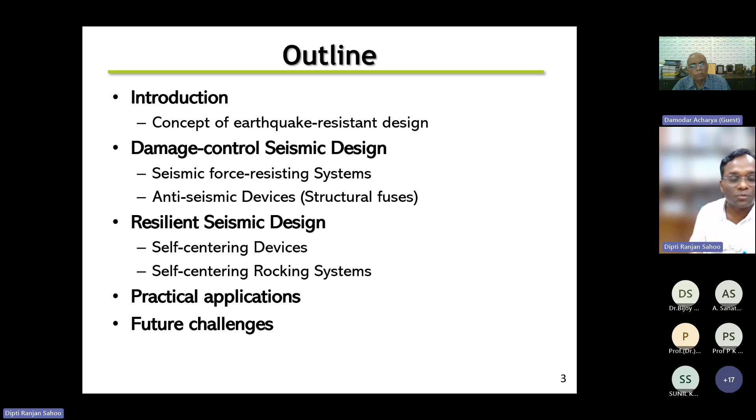So as we know, the earthquake is a result of some kind of release of energy due to breaking of some plates. It may be within the plate or maybe sliding between two plates, which occurs a few kilometers below our earth surface. Where it happens, we call that the focus. And if we directly see on the earth surface, we call it the epicenter. So the focus is the point where a lot of energy is released, and that energy is transmitted all around in terms of waves.

And these waves pass through the body of the earth, so they are primarily called the body wave. Once it reaches the crust of the earth, it's called the surface wave. In case of the body wave, there are two things: one is called the primary wave and one is called the secondary wave. Out of these two waves, one is much faster than the other. Typically the P wave, the primary wave, travels much faster, and it can pass through any medium, whether solid, liquid, or gaseous. Whereas the secondary wave, the S wave, can only pass through the solid medium. And what is dangerous for our civil infrastructure is the surface wave, not the body waves.

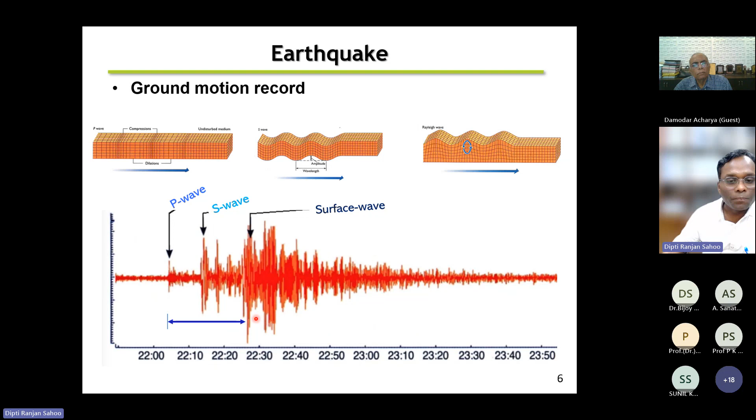We know that it is an energy release; we have energy release in an explosion also. So I just wanted to give an impression here: if this is the signature of a wave, you can clearly see this is the earthquake. There is a P wave, an S wave, and a surface wave. Whereas if you have an explosion, like an underground blast or above ground blast, the wave signature is quite different from the earthquake.

This gives us a lot of information about the nature of the signature, because at one time you have the P wave, then after some time the S wave, and after some time the surface wave. The gap between the P wave and S wave gives us some information to work on the earthquake early warning system, which I will talk about briefly towards the end of this lecture.

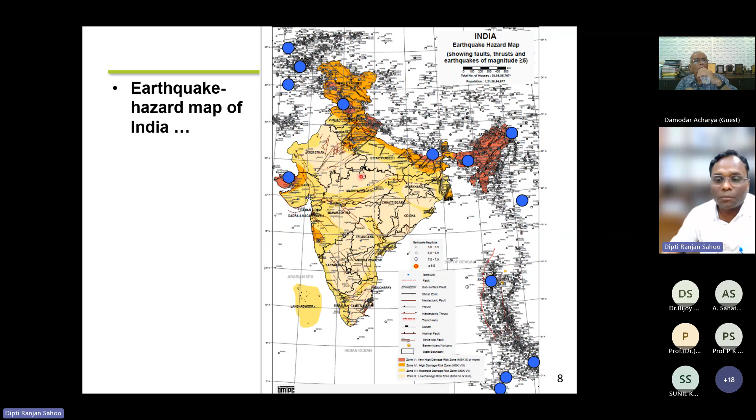And if you look at the major or big earthquakes, with magnitude of more than 8, there are a number of them. So in the entire Indian subcontinent, you can see there are many faults which are quite active and have the potential for generating relatively bigger earthquakes.

So what we have right now is called the current practice in terms of design. In design, we expect that for the same structure, if there is minor shaking, after the shaking my structure should not be damaged. I can use the structure immediately. For moderate shaking, there will be some damage which can be repairable and reusable.

And if the same structure is severely shaken, the goal is it should not collapse, so I can save the people who are occupying this building. So the intention was that no building or bridge should collapse under severe shaking.

What is of interest to us is that many minor earthquakes happen; in Delhi, every 1 or 2 months there are a couple of minor earthquakes. But if there are moderate and major earthquakes, the damage should be controllable, in a controlled manner. That depends on how well we have designed our structure, and at what level of damage we can allow. So that is essentially the current earthquake design practice.

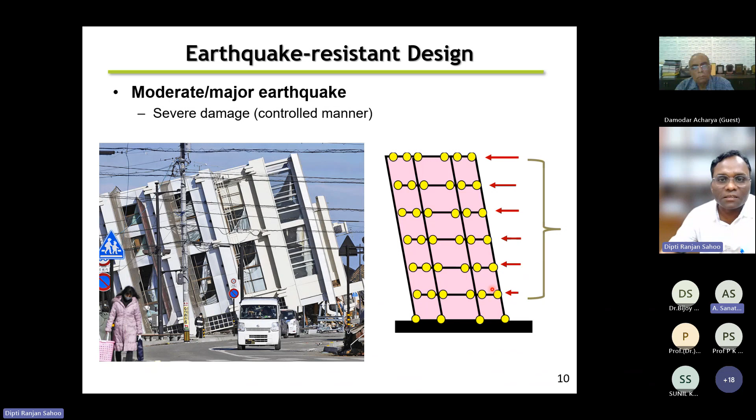To give an overview of earthquake resistant design: the basic philosophy currently is that during an earthquake, it doesn't mean that my structure will not be damaged. I allow my structure to get damaged, but it should not collapse. So there is a difference between damage and collapse.

The term damage means anything which is not a linear response. Because of the inherent structural or material characteristics of the concrete, steel, and masonry we use, we can always rely on the nonlinear response of the structure. For example, the Taj Mahal has been standing for a long time without any damage, probably having experienced relatively moderate earthquakes.

Because if you compare the dimension of the wall, it is in terms of meters. But if you look at our walls, our columns, they are quite small. So the reason is that making a structure that will not be damaged in an earthquake will be very, very expensive. The second one is there is no guarantee that during the lifespan of the structure there will be an earthquake.

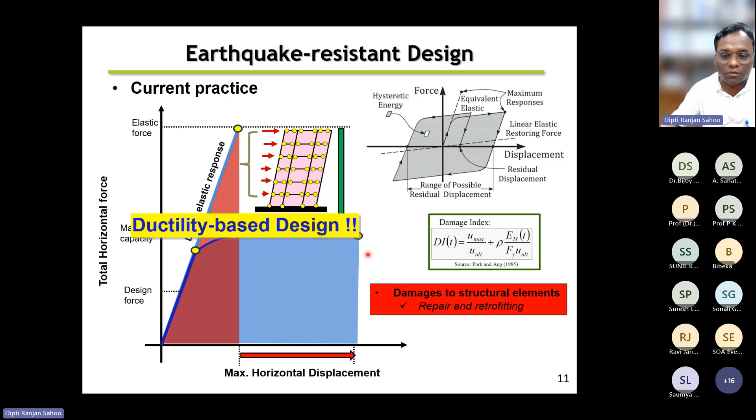That's why the current design practice is based on a term called ductility, which is essentially a measure of the displacement from your linear portion to the ultimate deformation level.

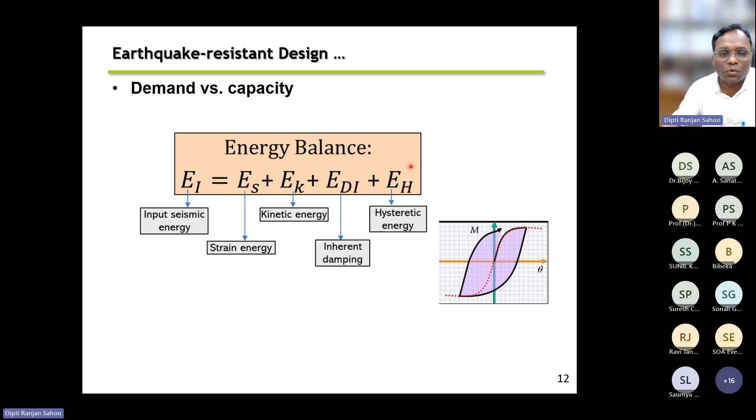So the output is a combination of the strain energy, the kinetic energy, and each material has some kind of damping, so it also releases or absorbs some energy. And the most important point is, because the earthquake loading is cyclic, there will be some hysteretic energy. I will come to this part in detail in a subsequent slide. So if this is the capacity of my structure, if this component is higher than this, then my structure will survive, otherwise it will fail.

So in terms of the hysteretic energy, if I take a structure and pull it or push it, if it is linear, this part is called the energy stored, because if you release the load, it will come back to the original position. If you again apply the load, there will be a point when it will go to the inelastic range. And if you do cyclic loading, this shaded part will be energy recovered, because it's essentially the same as this area.

So if you look at this part, it's a kind of rhombus, or parallelogram. This is typically the area which is the energy dissipated. And if I have shown it in one direction, if you also draw the negative direction, that becomes your hysteretic energy under cyclic loading. So that is the strategy we use in earthquake engineering.

So the first part is we reduce the intensity of the vibration by adding some additional damping, which is simply called the damper. For example, in your door we have a door stopper, right? When you open it and just release it, it will come back to the original position because there is some damping involved. And in structures, a similar kind of concept is used, that is called damping.

Or we can increase this component, which is called the hysteretic energy. That means we need to increase this kind of flag-shaped area, which is called the capacity. So the more this area, the higher the earthquake resistance capacity of the structure will be.

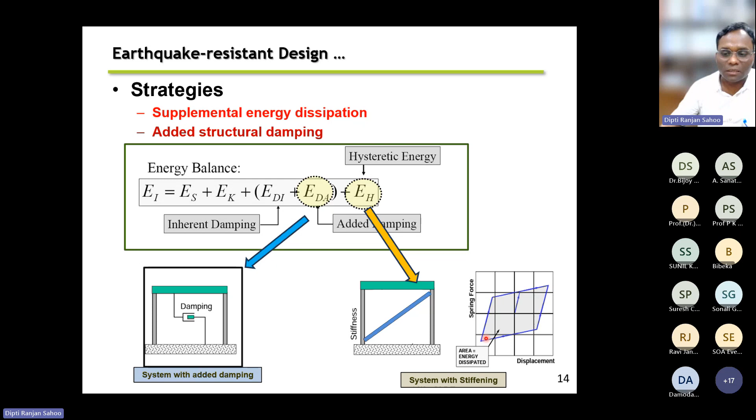So just briefly, what is the effect of damping. I give the example of a door stopper. Mostly the damping comes from the term associated with the viscosity. This is called viscous damping, and we typically represent it in kind of dashpots.

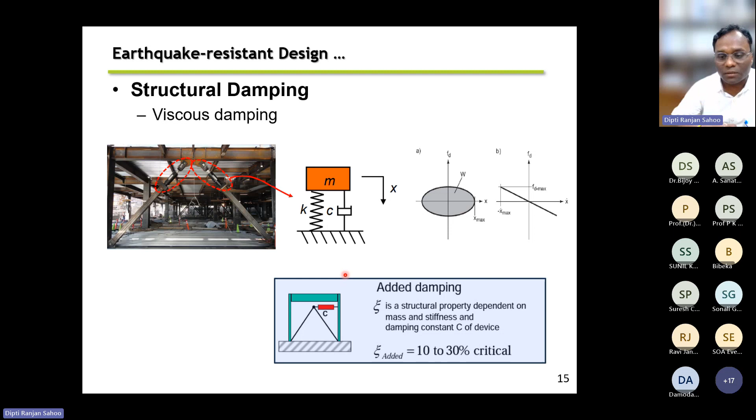If you look at a structure, probably I can use two viscous dampers here. And if you look at their behavior, the force versus displacement behavior, this area is the energy being released or dissipated. A typical viscous damper used in the structure adds additional damping in the range of 10 to 30% in addition to the inherent damping.

The effect is, the more the damping you have, the faster degradation of your vibration effect. At the same time, if I have a structure which is more damped, I can design my structure more efficiently, because the force demand required to design the structure also reduces.

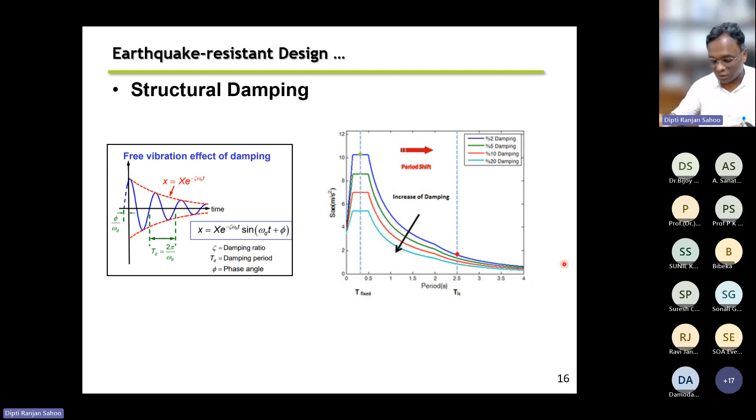But it has some demerits, which I will explain in subsequent slides. The whole idea is to increase this area, because the more the area, the more energy dissipation capacity the structure has, and it is better for earthquake resistance. So there are many ways to do this.

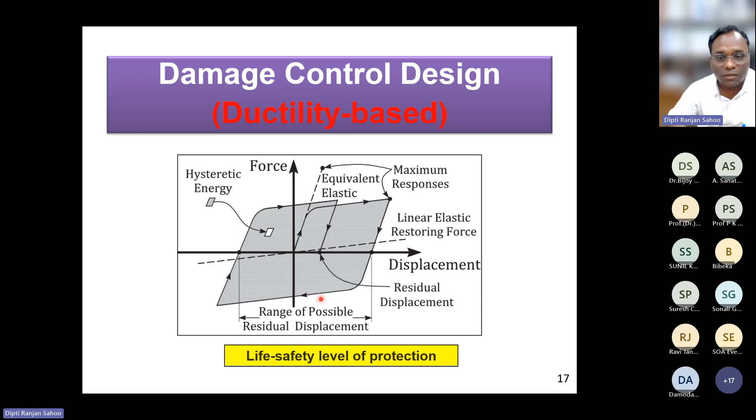Our team is working on making cost-effective solutions where the device we create doesn't require some power supply to get activated during the earthquake. At the same time, it will not damage your primary elements like beams or columns for buildings, or piers for the bridges. So the whole idea is how well we can utilize the steel.

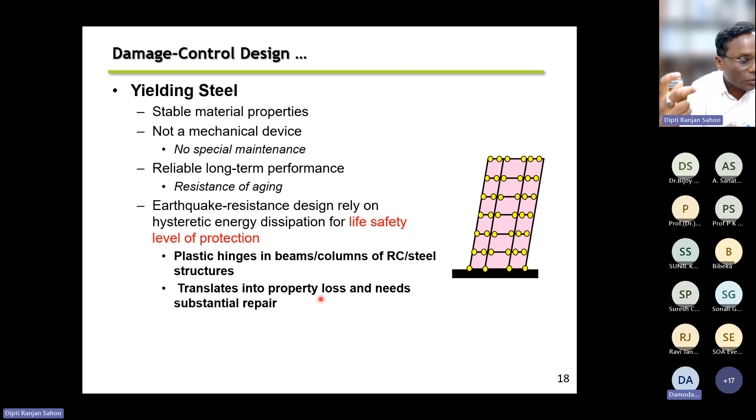That means we allow the steel to yield - that's why I'm saying it's yielding steel. Why steel? Because steel is more ductile, has stable material behavior, is not a mechanical device, and has better long-term performance in terms of resistance to aging. So whether it's a steel plate or steel bar, if we can utilize it in a more technical or engineering way, we can increase this energy dissipation capacity.

The second point is the same steel plate can be designed such that the plate will take the axial force, or the same plate will take the shear, in-plane shear or out-of-plane shear, which is the flexural thing. The goal is to exploit the steel, because mild steel has a failure strain of more than 20-22%. If you have that much deformability, we can utilize this to design our systems.

Now, since I'm talking about increasing this area, what happens to the damping? Because I'm not using any kind of viscosity-based fluid here - viscosity, for example a door stopper, has some life and requires maintenance, which is not the case with steel.

Fortunately, if I rely on the yielding of the steel, which gives you this kind of curve, I can always find out the equivalent stiffness, and I can always find out the equivalent viscous damping. The most important point is that the force generated by these devices is in phase with the velocity and directly proportional to the displacement.

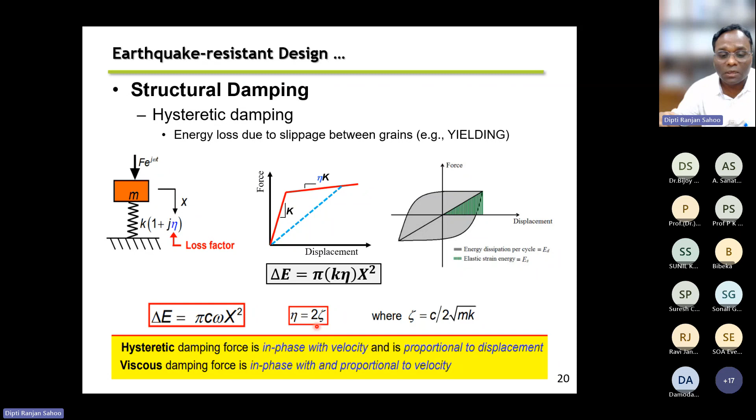So the higher the displacement capacity, the higher the hysteretic damping, whereas your viscous dampers are mostly in phase and proportional - the force generated is proportional to the velocity.

Based on this hysteretic damping or hysteretic energy dissipation, the systems can be divided into two broad categories. One is the anti-seismic systems, where you have the beams and columns, but in addition you have the diagonal elements, installed throughout the building or throughout the structure. We call this a stiffening structure.

In the other type, it's a small element you install at some floor levels, and the idea is to absorb or dissipate the energy at isolated locations. We call them the structural fuse.

The difference here is both kinds of systems are anti-seismic, but in one case you get the stiffening effect, so it becomes stiffer, you get hysteretic energy, you get the damping. Whereas in this case, you get energy and damping, but the stiffness increase is not that much. Typically we call this one the fuse, similar or analogous to electrical fuses.

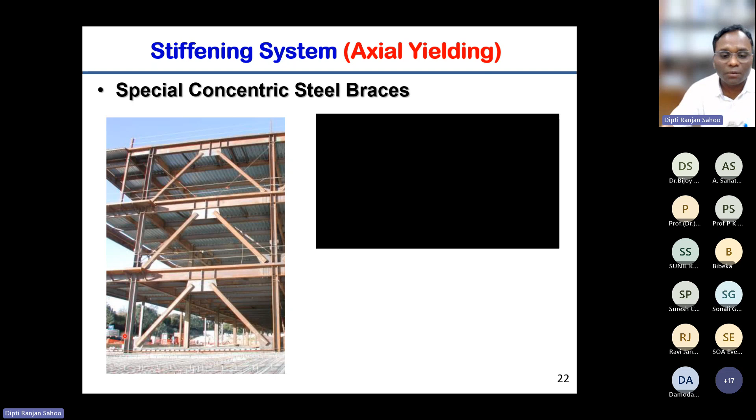In case of stiffening systems, you might have noticed that many structures have diagonal elements, we call them braces, and these are typically made of steel. If you try to see how they actually behave under earthquake loading, at any point of time one brace will be in tension, the other brace will be in compression, and at some point there will be a fracture of the brace.

If you see the typical brace hysteretic behavior, on one side there is no degradation, but on the other side, in subsequent cycles, your strength is actually going to reduce. If you see the area enclosed in this section, this is your origin, and the area enclosed in this portion - you are losing this much area because of the buckling. Buckling is a kind of instability which reduces your subsequent load carrying capacity.

Having said that, it is one of the most cost-effective systems and is mostly used in many steel buildings as well as concrete buildings, primarily for strengthening or stiffening purposes.

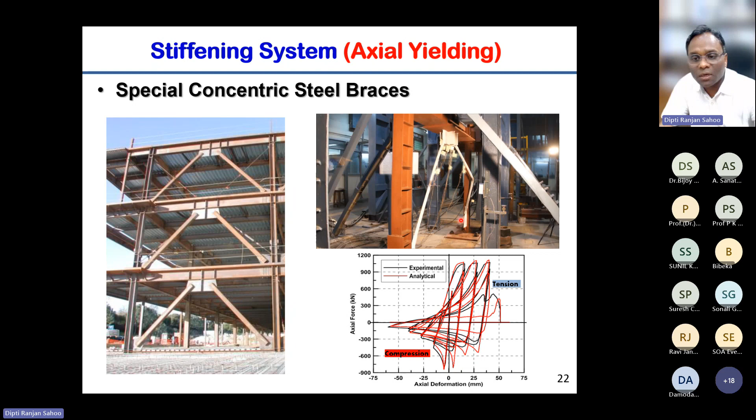So we can't actually prevent the buckling of the brace. But what we can do is, if you see in detail when the brace buckles, there are three potential locations where there is inelastic behavior - one at the middle, one here with some bending, and one here. These three locations are where the excessive inelastic deformation takes place.

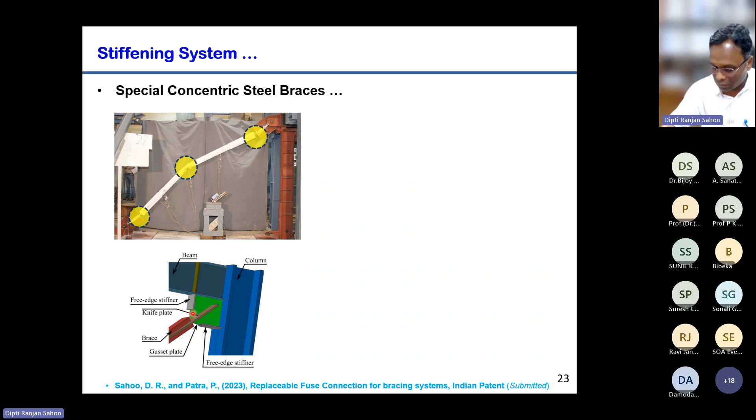So in the same brace, we try to develop a connection and detailing such that before this connection fails, it will give you additional energy cycles. In addition, at the end of the brace, we proposed a simple connecting or detailing system, similar to testing steel coupons, so that during cyclic loading, this part uses detailing based on friction and tension/compression.

Test results showed that typical steel braces can only sustain 2% drift level, but this detailing which we developed gives story drift up to 5% without failure. But please note, we are not trying to increase the area here, we are trying to increase the deformability, so that in the previous typical brace frame you stop around 1.5-2%, but in this case one can go up to 5%. So you get a wider area without failure, which improves your energy dissipation capacity. We have submitted a patent for this, which is under review.

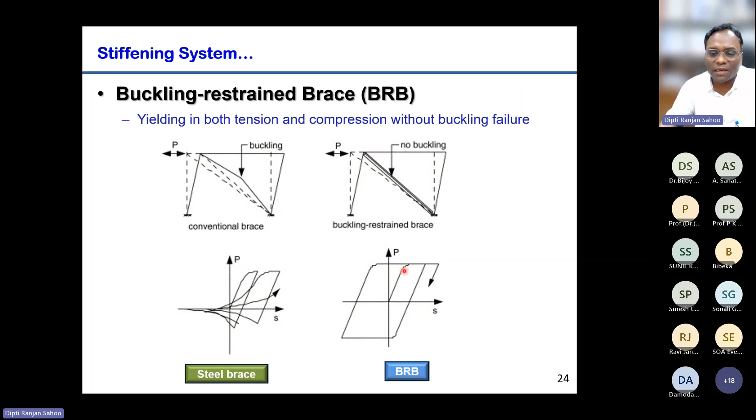Now, building on this area, the idea is: can't we increase this area further? Since it is essentially due to buckling, the question is can we prevent the buckling of this system? The answer was yes, it is possible. Theoretically, if this is the traditional brace and we can prevent the buckling, the whole force-deformation curve will look something like this - you can see equal area in tension and compression. This is called the buckling restrained brace, based on what's called higher mode buckling.

Typically, if you keep adding lateral support, your buckling strength increases - one support added at the middle increases it by 4 times, if you add 2 supports it increases by 9 times. When you increase the buckling strength, it doesn't mean there will be no inelasticity, because steel is a material which has nearly symmetric material properties in tension and compression.

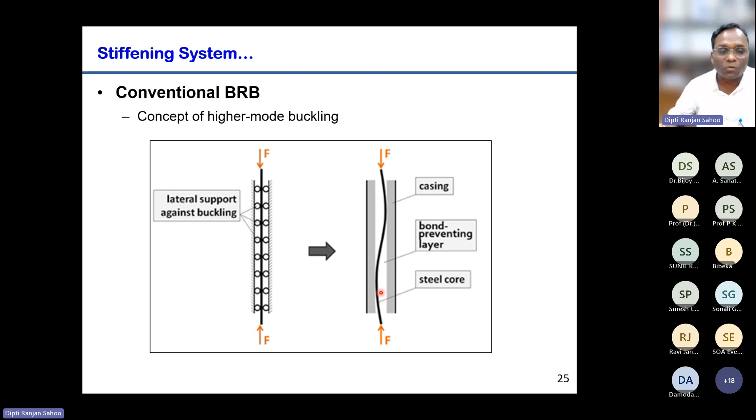So once you prevent the buckling, it will yield in compression as well. This is a typical BRB, which has been around already for 10, 15 years. This is the core plate. The only thing is, this is the plate which actually, you can say the brace, which takes care of the load or transports the load.

And this brace, or this core plate, is placed inside a tube with some kind of mortar, so that the core plate is free to move. But when this plate tries to buckle, this system which is encasing it will prevent the buckling. So you can see the typical force deformation behavior of a typical BRB.

But there are some issues with this. The first one is these are patented items, which means the manufacturer gives you the data like how much force of the brace you want, and they will manufacture and deliver to you. So the question is, if you don't have the manufacturer in India, you can't use this.

The second point here is this system, you can't see it. Actually, the outer casing is only to hold your main core. So after the earthquake, what happens to the core is not known. That means either you have to break it, or you have to buy a new BRB and do this.

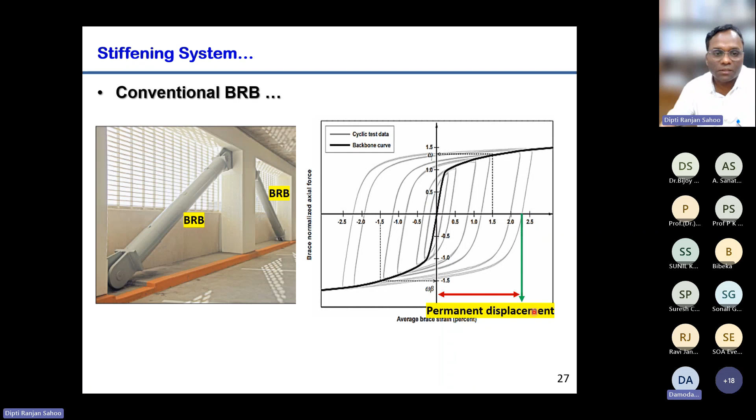So with this in mind, what we try to see is that traditional BRBs use concrete for some kind of casing. So we worked on using some novel materials and additional elements. What we did is try to create a modular, low cost BRB, which is all metallic, and which can be installed and in fact fabricated and assembled at the site.

So this is one of the BRBs I'm showing here, which is nearly full scale and which we have tested in our lab. All of these are bolted. One can clearly imagine this is a BRB installed in a structure, and after the end of the earthquake, you can go back, loosen the bolt, and see whether the core is there in perfectly good shape or not.

The challenging thing was how to ensure that this will act as a BRB as long as your outside casing is not too heavy, while at the same time being stiffer, to act as a kind of restraining system. So this is one of the patents actually granted in 2023 — we applied in 2020 for the low cost BRB.

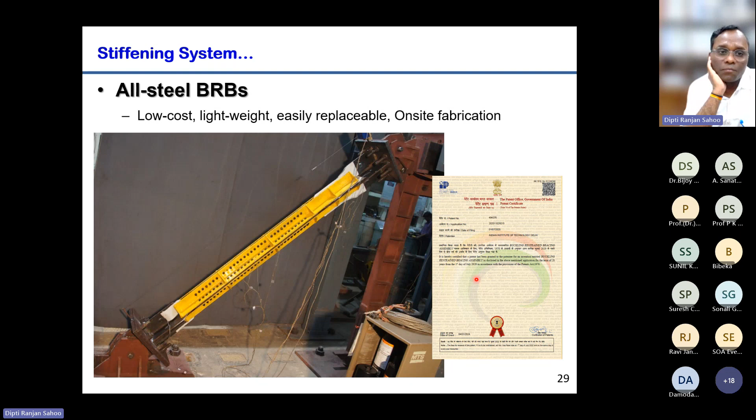If you go into detail, there are so many components involved here, but this is the one which gives the load carrying capacity. So these BRBs are full scale, of length 3 meter, 4 meter, 5 meter. I'm showing one of the tested results we did in our lab — you can see the nice curves without using any kind of tubes or concrete. It's a simple low cost construction, modular.

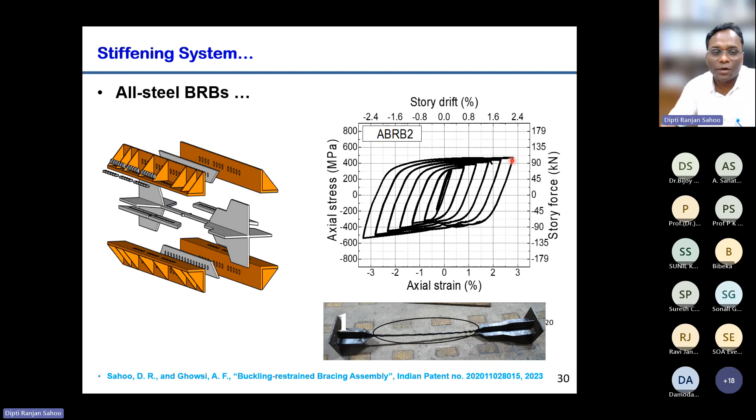The second part is the fuse. The fuse is a kind of small device, which can probably be handled by a couple of people at the site. It is the same as an electrical fuse — the role of the electrical fuse is that it's there, and it allows you to complete the cycle.

But when there is a higher load, the fuse actually burns away, so that your appliances are not damaged during a high electric load. So what you have to do is go back, replace the fuse and put a new fuse there. Same thing, we have the concept of structural fuses.

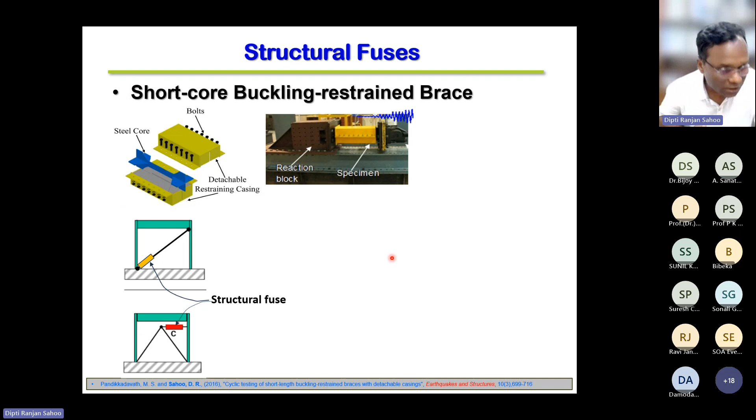And there are many ways we can create this structural fuse. Again, all these are passive devices. That means you don't need your device to get activated during the earthquake. So the first part is, till today BRBs are developed with the understanding that they have to be 3 meter or 2 meter long to get a hysteretic response of this shape. But what we did is we created a short core BRB. That means it can be only 2 feet long, with some modifications.

And again using steel. For example, you have a column and beam system. You can simply connect a brace and your BRB here. And for the typical BRB, you can see this is one of the test results I'm showing here. This is the test setup. This is the BRB you can see here.

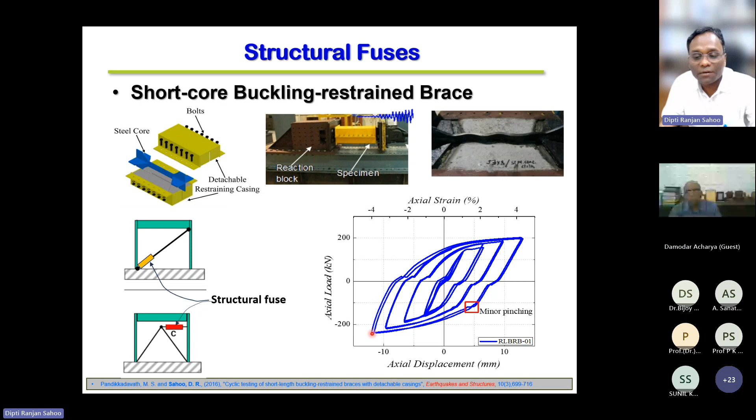So it not only gives you a nice hysteretic curve, you can clearly see that there is a higher mode effect coming into the picture. So the buckling is there, but they are not buckling in the first mode. That's why they are not governing. So the similar force in tension and compression you get through the yielding of the material.

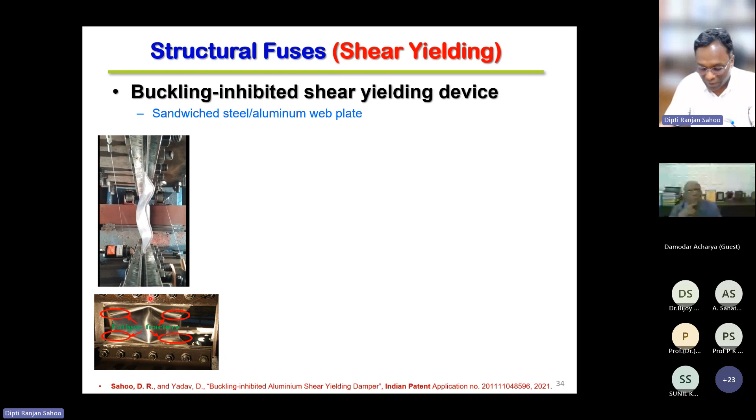And you can see one of the photographs without any kind of out-of-plane deformation. You can see there is some fracture taking place. And we can also delay the fracture, because in earthquake loading or earthquake shaking, the low cycle fatigue aspect is also very important.

So it's the same as the previous one, where you can think that there is a device installed here, but this device is a little different from the previous one. It looks like there are many stiffeners here, but the main energy dissipating element is actually sandwiched between two assemblies here, and there is a gap here. So you can see there are four parts, there are many parts actually, but they are connected in this way.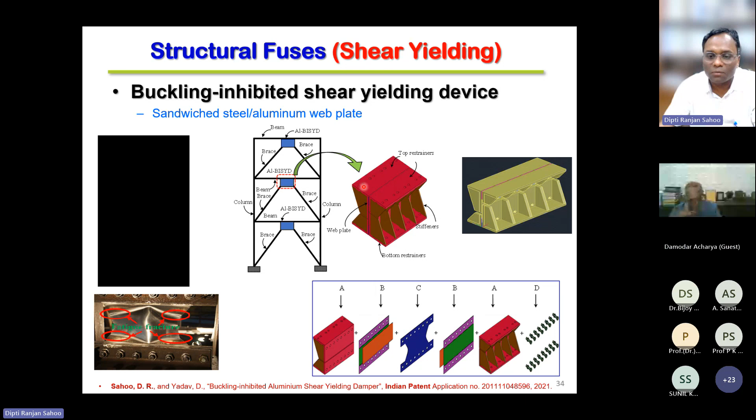So this C is the centralized element, which can be any kind of shape, that I'm coming to on the next slide. And then it is sandwiched between two plates, and then finally you have this on the left side, and this one is the right side, and this is a bolted connection.

So to get this shape, we did the shape optimization. That's number one: what is the best shape you can get to maximize your energy dissipation capacity. The second one is you usually get a plate and during the fabrication you do cutting and so on. And what we see is that when you cut the plate, there is some heat generated, and it actually reduces the ductility to a large extent, however small it is.

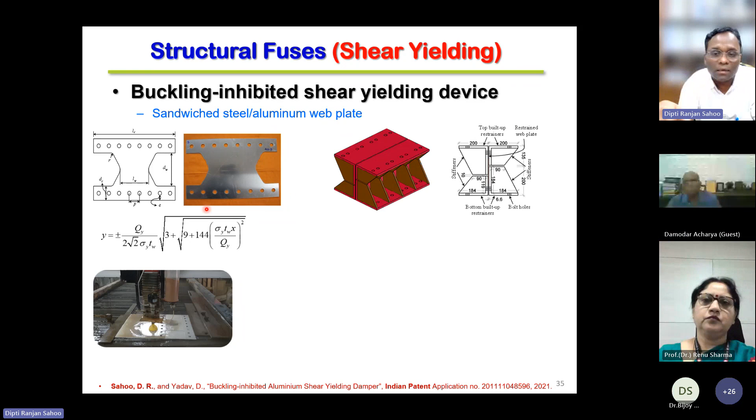So what we actually did is we used a technique called the water jet cutting technique, so that your material characteristics are least compromised during this process. We developed the shape, and then we played with different materials like steel and aluminum, and then it comes out with this kind of shape. We tested around 30 such dampers, which are called buckling inhibited shear yielding dampers or shear yielding devices.

I'm trying to show one of the videos of how it actually looks during the earthquake condition. You can see the lower one is fixed and the upper one is moving, and the main core plate, which is not visible, is actually moving left to right under in-plane shear.

And these are the sample results I'm showing here. This shows the maximum strength and the maximum strain or displacement it can take. And you can see up to 15% they are good, and one can also rely up to 25% to have better strength.

And this one is for the low cycle fatigue. You can see that the same specimen sustained at least 90 low fatigue cycles before it fractured, and any device which has around 90 to 100 low cycle fatigue characteristics is assumed to be a good device for earthquake applications.

So up to that point, we are talking about the current practice. That means you allow the damage to be there in the structure, but at the same time, you don't want your primary elements to get damaged. You want to dissipate the energy so that your beams, columns and walls are not subjected to the heavy force, or so that the damage levels are controlled.

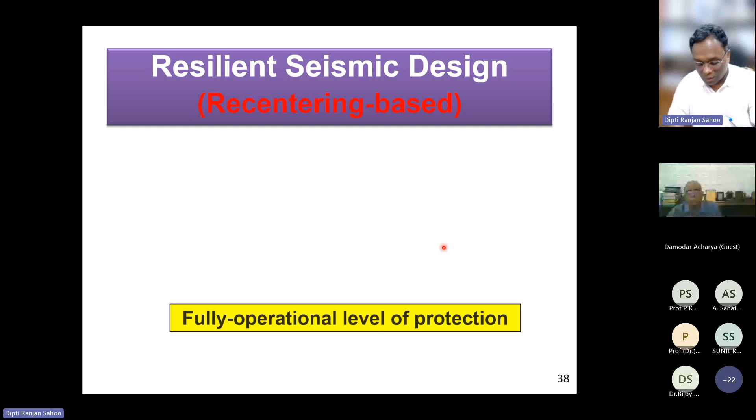So under this, I'll try to show a few devices which we have worked on and actually tested as case studies. So how it worked, take the example of the BRB part. The BRB, which is ductility based, essentially requires to pull back to its original position, and that means you have to add a self-centering system. And for the self-centering system, there are many options. The best options are actually the shape memory alloy material you can use,

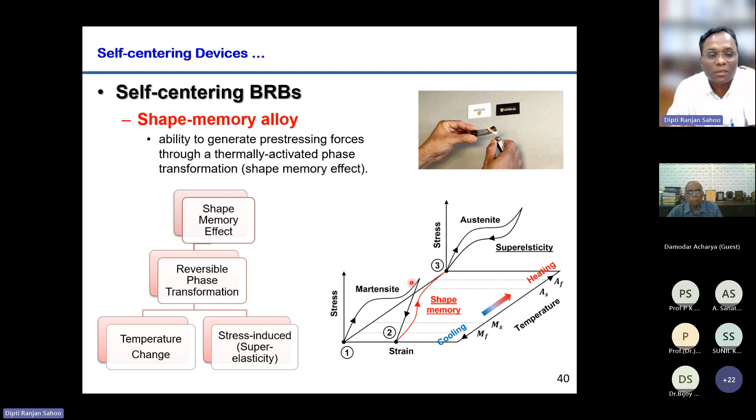So essentially you can control the temperature, apply the temperature on the lower side or higher side, so that your martensite phase actually becomes austenite, and vice versa. So it has a reversible phase transformation under temperature loading. So if we can utilize the superelasticity behavior and make some kind of device, that is what I was looking for, something like this. That's why the shape memory alloy was chosen for developing these braces.

However, the issue was, shape memory alloy is not available as a plate, and first of all, it's not available in India, unlike steel. The second is there is limitation in terms of what you get in the Indian market. So what we tried to do is explore two alternatives. One is, of course, using the shape memory alloy. At the same time, we tied up with one of the industries and said, can we combine the shape memory alloy characteristics with steel?

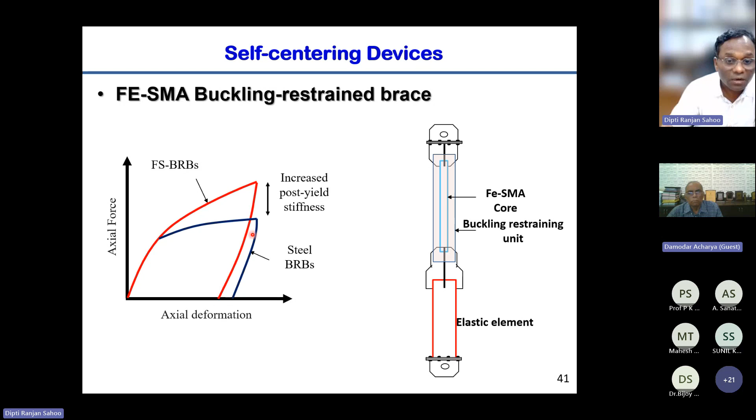And the whole idea is, if you see, this is the behavior of the steel, and if we can change the chemical composition, we can actually get this superelastic material, which is called the iron-based SMA. It has strength greater than steel, and at the same time, when you are unloading, you minimize the residual drift or residual deformation as compared to steel.

So the configuration we selected is again all steel to steel. This is one configuration I'm showing. This is a plate which is not a steel plate, and it's not a shape memory alloy plate. This is an Fe-based, iron-based SMA core plate. And it has some issues because it is in between iron, steel and SMA, so it is sensitive to temperature. So welding was one of the issues, and then we tried to manage how to deal with making our device.

So in the second stage, instead of making one core, we tried to explore whether it can be multi-core, so that your hysteresis behavior, rather than a butterfly one, will be a stepped one. The whole idea is that it will dissipate the energy and it should come back to its original position. This is called the iron-based or Fe-based SMA BRB.

It's not the real length of the brace, but in terms of scale, it's quite a large-scale brace. We tested a couple of them in our lab, and this part is what I'm talking about, the BRB part. This can be one BRB or it can be a simple tube also. But here we tried to use the iron-based SMA, so that you will get some recentering. This is one of the patents, accepted last year.

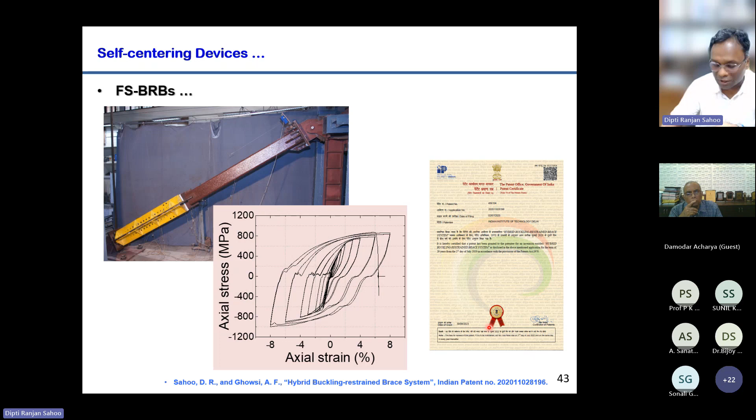Many times, like in bridge applications or beam-to-column applications, we thought, instead of a rigid connection, can we have something without damaging the connection? That means, can we utilize this material to make small energy dissipating devices called miniature BRBs? For this, we created very small damping systems. Again, this is an Fe-based SMA rod. In the previous case we used plates, and here we used the rod and tested it in the UTM.

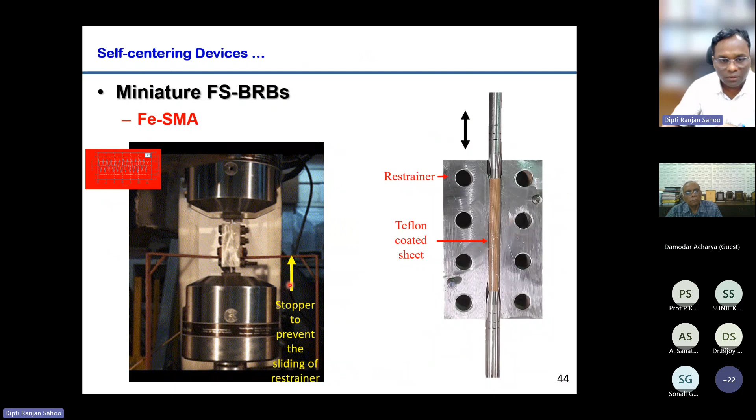You can see that this is the restrainer-based one, and this is one of the videos showing how they actually perform. You can see that, even though it is so small, they behave pretty well. They give you 7% drift, and before fracture you can see there are higher mode effects which we expected, and it has a better cumulative ductility of close to 500.

Now, coming back to the SMA BRB, since there were no plates, typically the SMA is made of nickel titanium material, a combination of two components. So we used the nitinol rods as the SMA. The idea was to use the BRB and SMA in parallel, that means the BRB inside and the SMA rods on the outer side. Remember, it's a rod, so you can always pull it. If you push it, the load carrying capacity is a concern, because it can go into out-of-plane deformations, not necessarily buckle, but it can go out of plane.

So the whole challenge was, can we combine these two things? Because your BRB needs to go from tension to compression, but the SMA can only take tension. So you need to first give pre-tension to your SMA rod. At the same time, they should work in conjunction with the BRB. So we used a double tube system: inside one tube the BRB, the other tube is the rod.

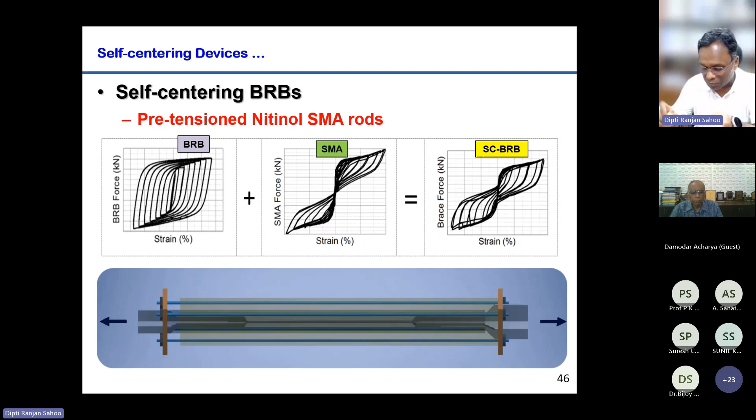I'm trying to show one of the videos here just for explanation. You can look at the rod. At any point of time, the rod is always in tension. When the BRB is extending, the rod is in tension. When the BRB is in compression, it is in tension, because there are load transferring tubes which transfer the load between the BRB and the rod. This is a more detailed explanation of the BRB tube, sorry, this is the SMA rod.

What we also did is, because the SMA is quite expensive, we minimized the length and cost by adding some rigid rods, and then this part is SMA. You can see the final product is this, and this is one of the devices we tested in the lab, and this is the nearly linear behavior we get with proper recentering due to this self-centering brace. This is again the patent we got approved last year.

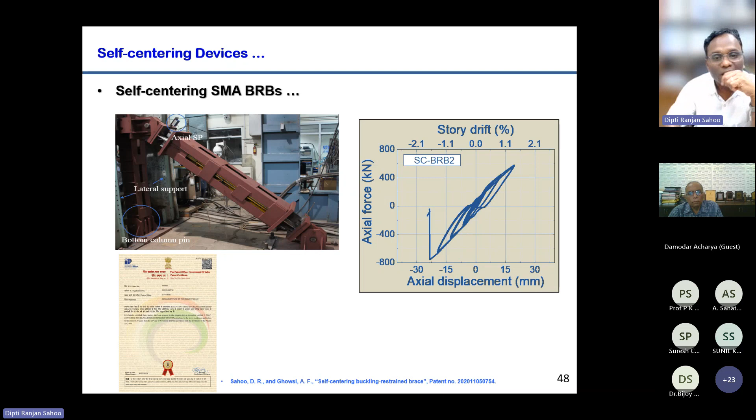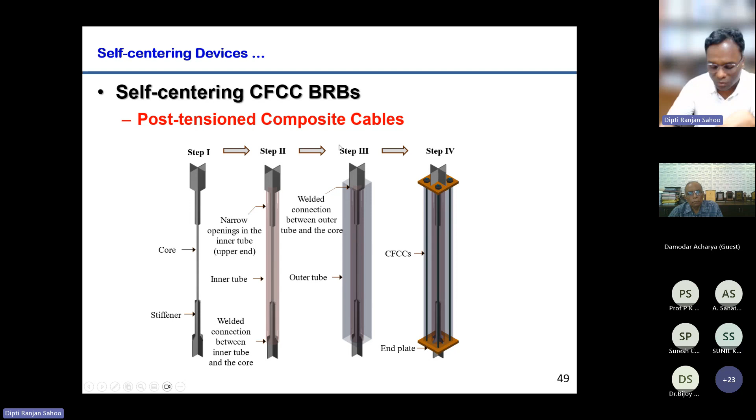A couple of times I said getting the SMA is not only tough, it is expensive. So we also tried to use the same technique using carbon fiber composite cables. The concept remains the same. It is the same concept we use in post-tensioned bridge girders. The whole idea was to bring your system, a BRB or your whole structure, back to its original position.

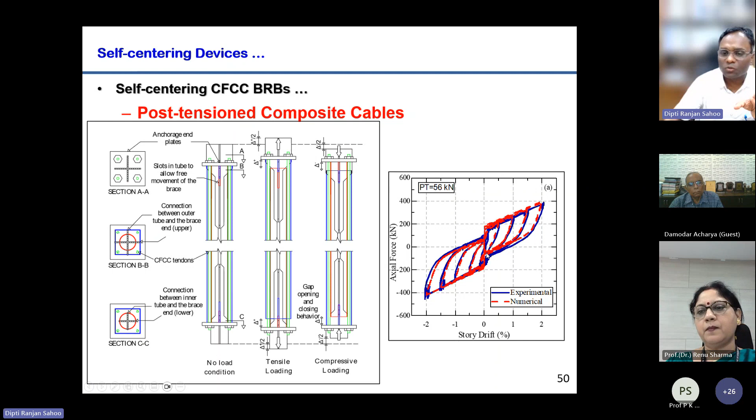This is more detail about this. You can see clearly here the hysteretic behavior, and because of the recentering, you are nearly coming to the zero position. That means your residual deformation is pretty low. So the last part of this self-centering system is going back to your ancient structures.

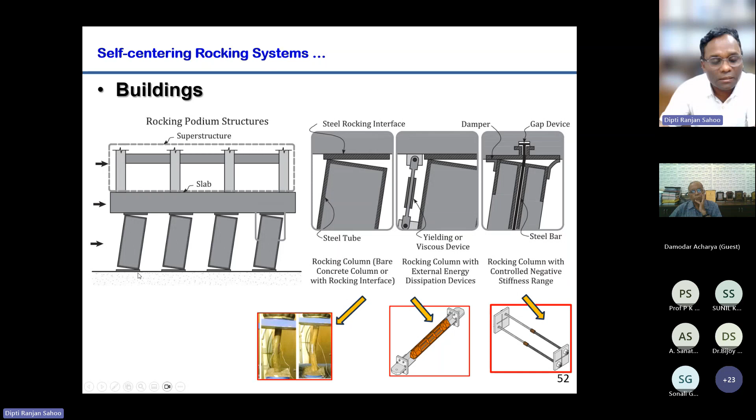So, taking that clue, what is planned is, if you have a building with a foundation, let's say the mat foundation or the podium, it need not directly rest on the ground, but instead it can be rested on a series of very rigid columns. So how to define these rigid columns? The best example is concrete filled tube columns, the tube filled with concrete.

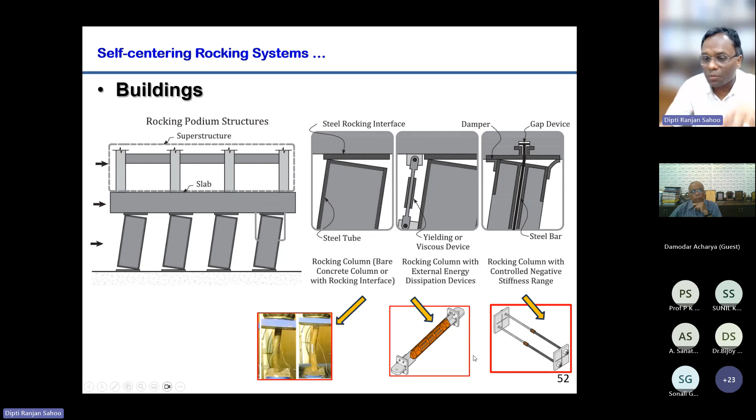And when there is an earthquake, you can see that this is the rocking position, and they will rock about the mean position and come back to the original position. Or it can be combined with some of the devices which we have discussed over previous slides, either BRB or some kind of post-tension or pre-tension rods.

The other application is, if you have multiple towers of steel structures or concrete structures, the same devices can be connected at the interface, so that when they are deforming from left to right, the energy is dissipated through these devices. So the concept is, instead of your traditional column, your column is a damper. It can be a BRB damper, it can be a friction based damper, or it can be anything on the pin.

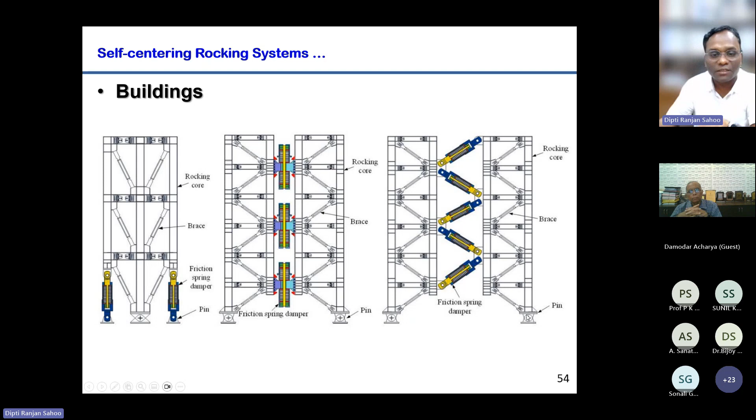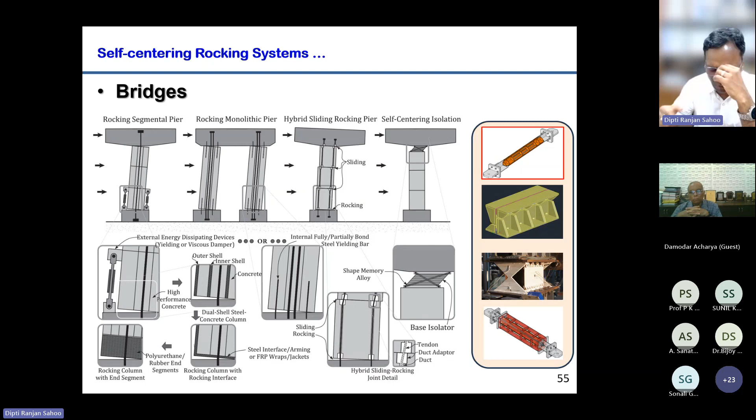A similar thing can also be for the bridge, whether it's a rocking segmental pier or a monolithic pier. You can see there is no physical connection here, but there is a pre-tension or post-tension rod here. And of course, to provide stability and increase the energy dissipation, we can use small dampers here at the base. So these are a few more applications for the kind of device I'm talking about, whether it's the BRB, the shear yielding device, self-centering BRB, or simple shear yielding devices.

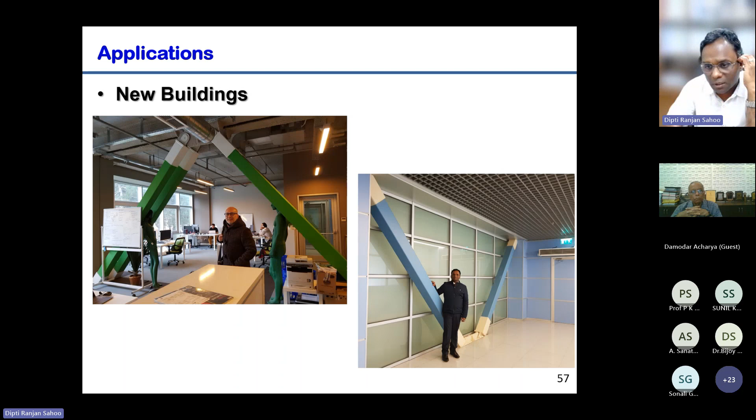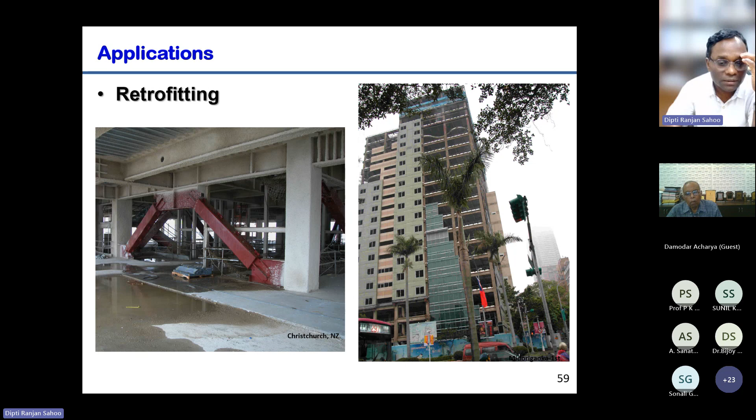So there are some applications and case studies I want to show here. These are some BRBs installed in real life structures. This is one building where the BRB was used to retrofit or rehabilitate it; this is a highly seismic zone. And this is one of the buildings in Christchurch, New Zealand, where the BRB was used to upgrade the structure after the 2011 earthquake.

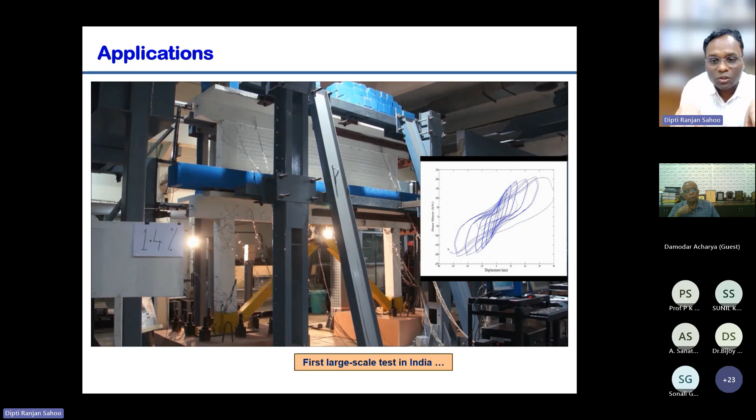And this is a typical structure which we test in our lab. In India, we have a concept where the ground floor is called a stilt, where we park, and all other floors are typically used with walls. This is the stilt kind of building, and these buildings are very, very vulnerable to earthquakes. One of the best examples is the Bhuj earthquake, where many such buildings collapsed.

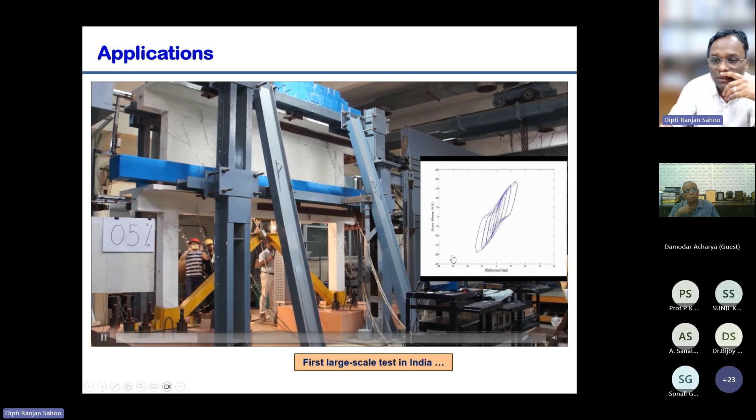So you can see there is nothing at the ground floor because we usually park here, and then you have the continuous top floors with masonry walls. So we tried to see, since we can't cover this area, what about installing some devices? So we used the simple shear yielding device, and you can see that it gives you a better result. This is nearly a full scale test and one of the first large scale tests on a two-story building in India.

Again, the same BRBs are currently used for steel buildings and very limited RC buildings, but for reinforced concrete buildings and bridges, it can be applied with a little bit of connection at the ends.

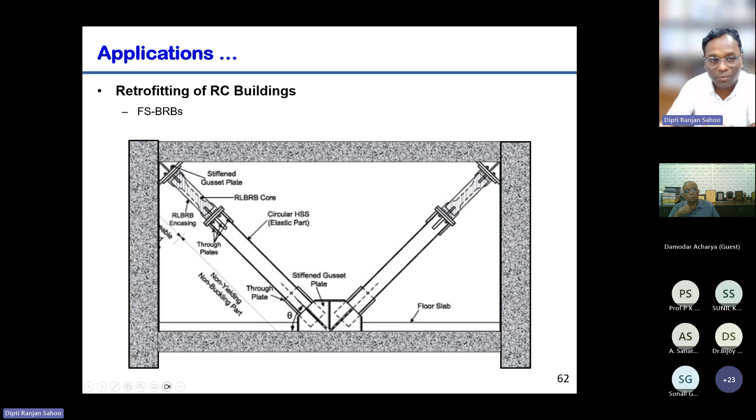For retrofitting also, we can go for the self-centering brace, the conventional brace, or the iron-based SMA BRBs. This is one of the braces we have discussed, but this can be used for upgrading any deficient buildings.

For high-rise structures also, this is one of the potential locations where you can use the BRBs to reduce the vibration effect and the damaging effect of earthquakes.

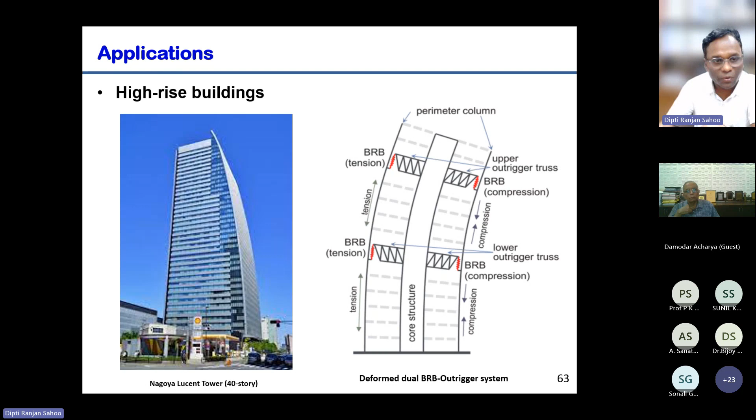So my last segment is about the future direction or challenges ahead.

I think the primary objective is to use the minimum material and get one of the best or most efficient damping devices. And sometimes we need a technique called magnification, so we include some kind of algorithm to magnify the damping force, or we can create new materials for the hysteresis damper for passive control.

More work is needed for high performance devices with very low energy supply, because during an earthquake, if your device is relying on power supply, then there is a problem. So most of the work I do is towards that aspect, that it has to be passive based devices.

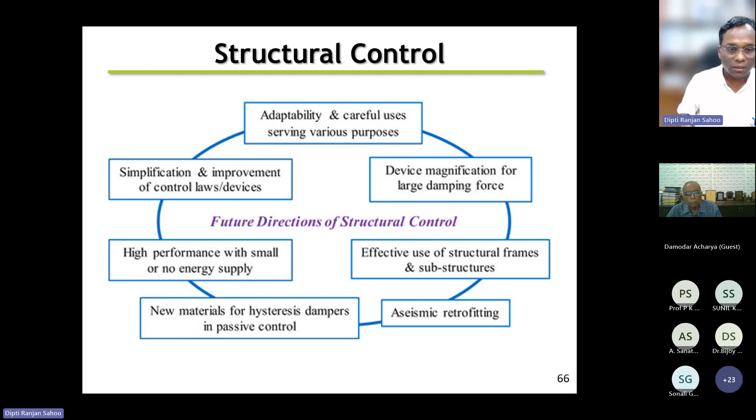The second point is disaster risk reduction, because we have an understanding of more or less the Indian subcontinent, the fault locations, the type of fault, and how big an earthquake the fault can generate. Then we have what is called the hazard, and then we have the exposure, like what kind of infrastructure we have and what are the demographic effects.

So taking this into account, one can calculate the vulnerability, and from that one has to create the loss matrix. Unlike seismic zonation, which is more towards the hazard, the loss matrix will be quite helpful for different cities to give an idea to the government to prioritize the action needed, whether during a disaster or otherwise, and which area needs to be focused on, because based on this analysis the expected loss in terms of people affected, repair, replacement, or business interruption will be higher.

So this is decision making. It will actually make a lot of impact if you do that kind of analysis.

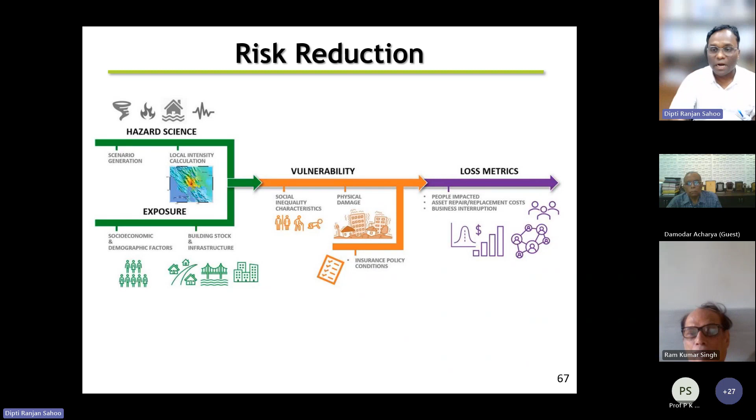We can't predict when this P wave will reach, on what date, at what time. But what we can do is, the whole idea is, can we capture this time? Because in most cases, the P wave and S wave are not damaging.

So if we utilize this time and sensitize, do real-time probabilistic seismic hazard analysis, and find out in which direction the waves will go and which city it will impact, then all the civil infrastructure can be connected, and a wide kind of advertisement can be done through the television or something.

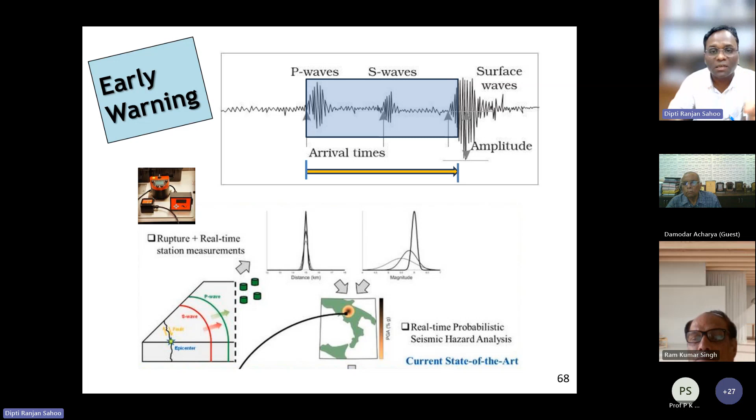Like in the metros, it automatically stops the moment it senses there is a vibration. But what I'm saying is that before that happens, during this time, since a lot of information is already present, this time can be utilized to sensitize people, to reduce the loss of human life or infrastructure damage in the event of an earthquake. That is called early warning.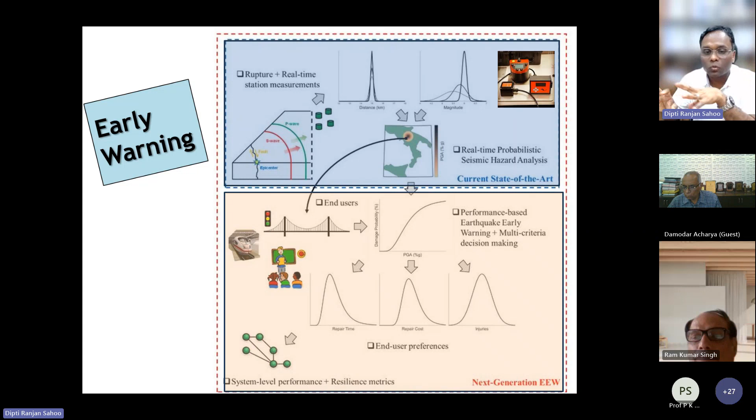What we are doing at this stage is we take the data and do real-time probabilistic seismic hazard analysis. What we should work on is to take this data and connect it, for example, to bridges or metros, or we can also create different scenarios for real-time loss estimation. That is called the next generation early warning system, which we should work on.

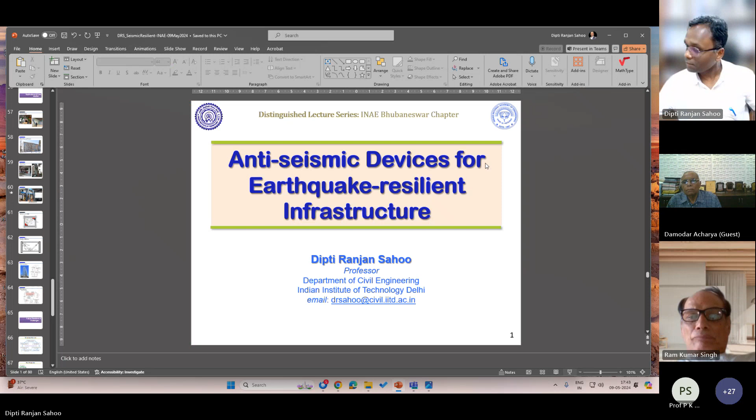Professor Sahoo, you have given a very elaborate presentation here, starting from earthquake to earthquake resilient systems, so many devices. All these things are not known to me, because I am not from this discipline. But definitely this was a very interesting lecture. I have got a couple of questions.

First of all, let's say countries like Japan, Taiwan, almost now and then earthquake is there, but the damage to their structures and buildings in these countries is actually not that much compared to other places. So my question is, what type of design do Japan and Taiwan use so that the effect could be minimum? Some idea?

I think it's a very good question actually in the context of this lecture. First of all, the Japanese construction practices are actually quite different from what we follow in India. That's number one. But Taiwan is more or less similar to what we have been doing in terms of the construction materials. In Japan, most of the structures are timber structures, wood structures. But if I talk about our society, it is more towards concrete and masonry.

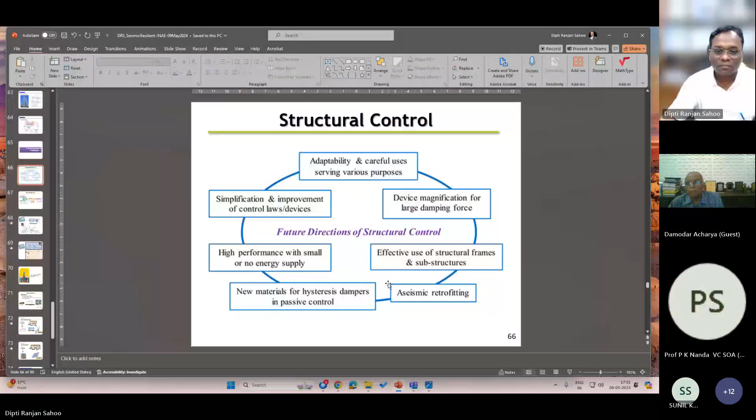Correct. So now shape memory alloy, you deform it, but when you want it to come back to its original condition, you have to heat it or cool it. You have to give a thermal load. So in your system, I don't see any heating or cooling system. So how does it return back? Shape memory alloy is not a spring, it will not come back on its own. You have to give it a heat treatment, only then it will come back. Am I right? If that is so, what is there in your system?

Yeah, that's a very good question actually. First of all, right now we are not applying any heat here. So fully exploiting the super elasticity or recentering capability of SMA by bringing it to zero is not what we are actually investigating here. First of all, if it is implemented in buildings or bridges, where would you heat it? So you need heating to do this. What we did is we first use some kind of pre-stressing at normal room temperature. So we want to exploit that, but we will not get the desired shape memory alloy characteristics fully, we can't actually exploit it here.

But if I go to the next point, which I have not included here, at small scale we did try to exploit this. We did a shake table study where we used real amplitude. These are slow cyclic tests because you apply the cycles at a certain rate, but when you have an earthquake, it is random and very fast. So we tried to apply some segment of the El Centro earthquake, and we did the shaking table study.

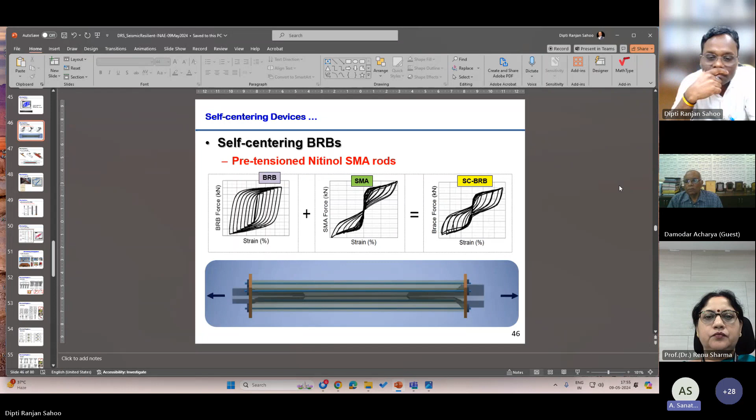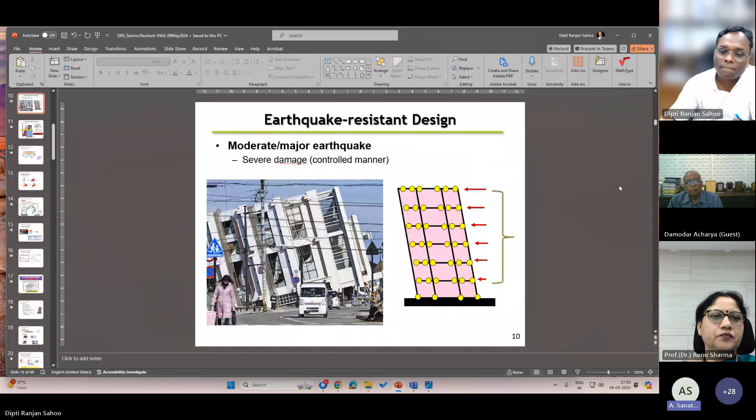Okay, thank you. Now I will go back to your first slide where you showed a strut which is deflecting. That cross strut, not this one, you showed the strut itself and it was deflecting. One strut goes into tension, the other goes into compression, you said, and that collapses. Now, if you know where it is going to buckle, can you not locally increase the moment of inertia there so that it doesn't buckle?

See, yeah, I think you're talking about this video. I think my slide is shared, right?

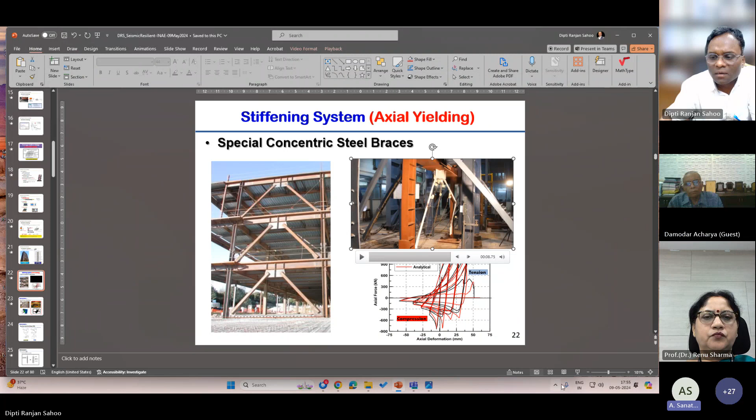Your slide I'm able to see, but this is not the slide I'm talking about. Earlier you showed a parallelogram going like that. One strut is in tension, the other one comes in compression and it buckles. Anyway, doesn't matter. You said that you put two struts, no? So when the building tilts, one side goes in tension, the other side comes in compression, therefore it buckles.

Yes. So now what I'm trying to say is, if you know where it is going to buckle, then can you not increase the moment of inertia at that area so that it will not buckle there? That strut is there, but locally increase the moment of inertia there. So actually, we can always do it in ideal conditions, but if we locally increase the moment of inertia,

every member has geometric imperfections, right? And that geometric imperfection will actually push the structure to buckle at some other location. It will buckle, but okay. You can't predict so much. Yeah. Okay. Right, because the geometric imperfections are there. Right. Then next question. I have got two more.

Next question is something that will increase your cost. You are worried about cost. I'm going to give a suggestion. Maybe you can consider. There are some stainless steels which can take 17% elongation, before yield and up to ultimate strength. There are stainless steels that are made in India also. Jindal makes it. Of course, they may not be available in plate form. They can make it in plate form if you really want it.

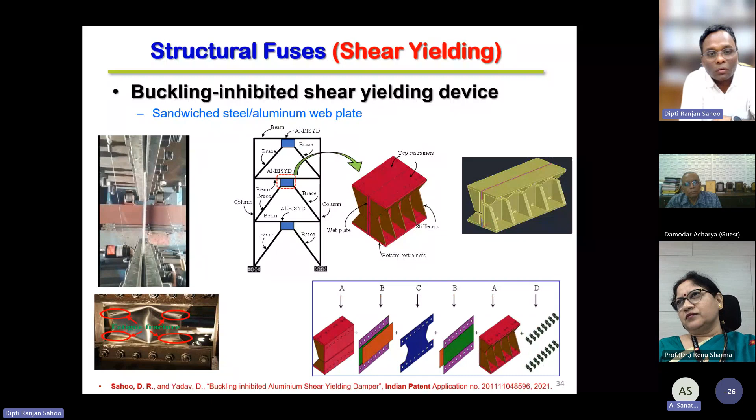So for the Fe-SMA, I can tell you the yield strength was around 900, and ultimate strength is around 1050, close to your pre-stressing kind of thing. So the high strength steel. That's why we focused on this Fe-based material. It was 887, a very specific kind of material we got. And sometimes the ultimate strength is way above 950 also, in some materials. Yeah, but I'll see this.

Unless it is cold rolled, you may not be able to increase the ultimate strength. You'll have to put carbon or any other thing, then ductility will go down. That's the problem with iron steel. Yes. This stainless steel is very good.

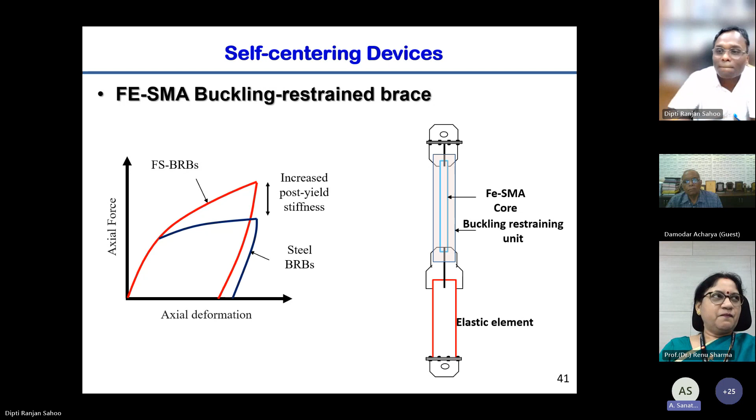Now, one more. Dr. Acharya talked about nuclear. So I am a nuclear man, or was a nuclear man long ago. What I wanted to tell you is that the time difference between the P wave and the S surface wave, you said there is some time difference. That will allow you to take some action. For example, trains to stop or something like that.

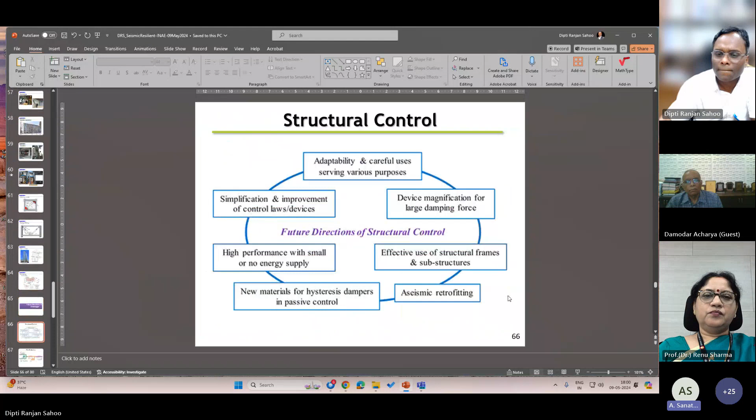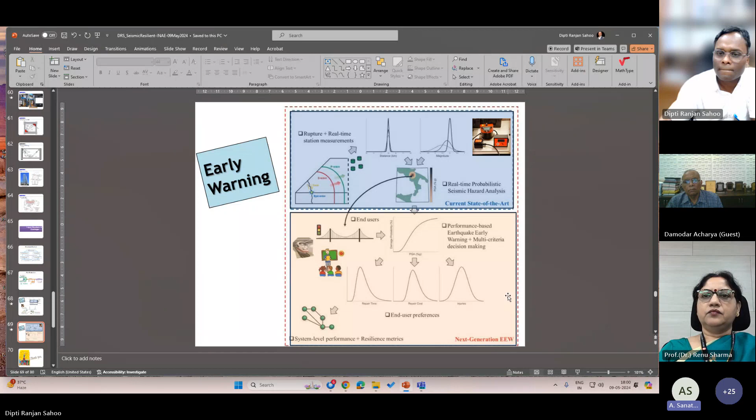When we were doing the Kakrapar reactor, our regulatory people said you trip the reactor when you sense an earthquake. So we needed to sense an earthquake 30 kilometers away from the reactor. That much distance we have to give for the wave to travel to the reactor. So before that, you trip the reactor. So we were trying to put what we call a seismic trip.

We were trying to put it, and as long as I was in office, that didn't happen. We were not very successful at that time. Maybe now they have put it, but it is 30 kilometers. But we were having only 2 seconds time. It has to be done within 2 seconds. So I don't know what is the time difference you are having. If it's very small, nothing can be done.

I completely agree. But again, see, it is not only the time, your all other systems, your real-time probabilistic seismic hazard analysis system, how well your hazard analysis has been done. So all these need to be done simultaneously to have a more precise early warning system. The first step is to trip the reactor so that it doesn't produce any more nuclear energy. That is the first criteria. Then everything else is supposed to stand.